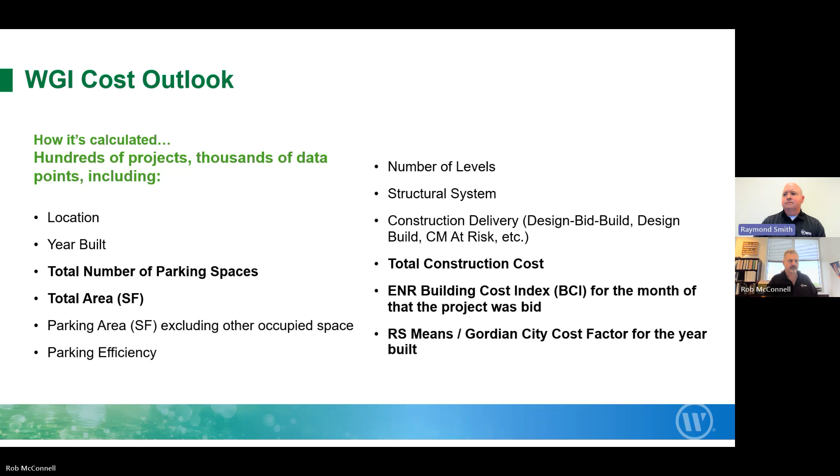So we start with the ENR building cost index, and then next slide we calculate what we call bringing it to today's dollars. So the escalation factor: we take today's ENR building cost index for May of 2026, when we wrote the article, and we divide it by what it was back in July of 2018, and we get an escalation factor of 1.41. That brings that project's construction cost to today's dollars by multiplying the original $4.4 million garage by that factor. And now today it would be 6.19, and it would be 22,000 a space and 64 bucks a square foot.

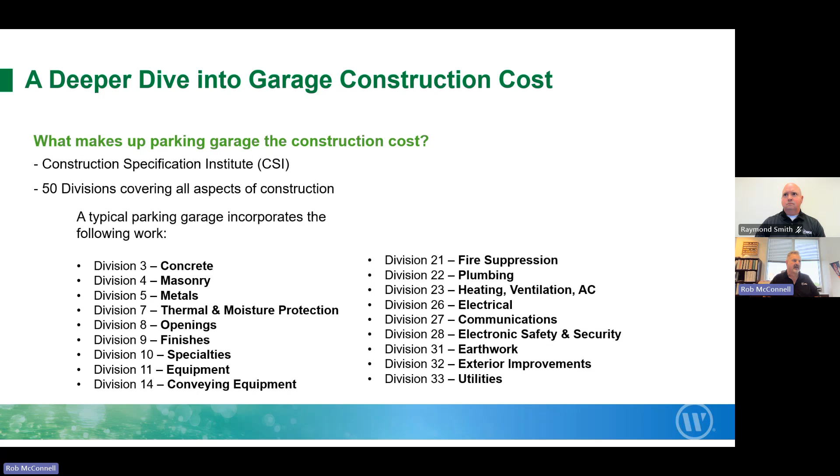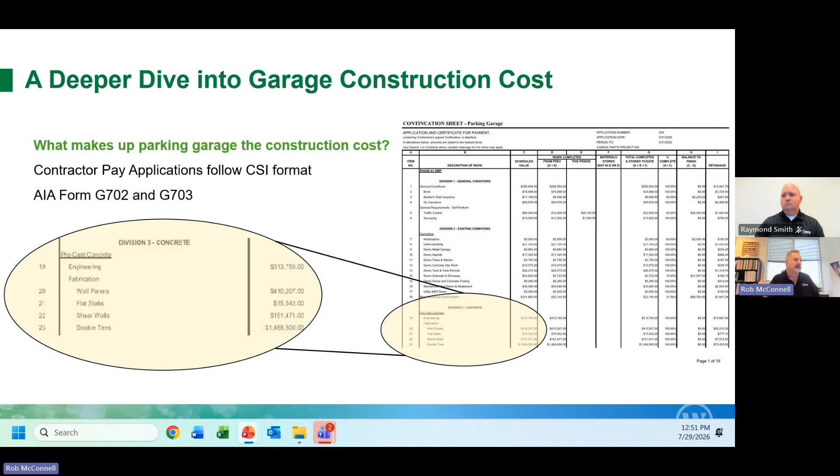So jumping into the nuts and bolts here, the items that make up the foundations and the superstructure, mostly for parking garages: concrete, steel, a little bit of masonry. Unless you have a steel garage, which there are a few of those around, the concrete makes up about half the cost of the garage, and then masonry and steel contribute a little bit, 3 to 4% beyond that. And again, caveat that with if you're putting a roof on the garage, that's going to add more steel cost and whatnot. But that's just in general the superstructure of garages.

When I got into this business, the gentleman that convinced me to come on board said, and this is appealing to a young structural engineer, the beautiful thing about garages is that they're almost pure structure, and that plays itself out in the cost as well. There's very little in the way of finishes and amenities, although that's changing to a certain degree.

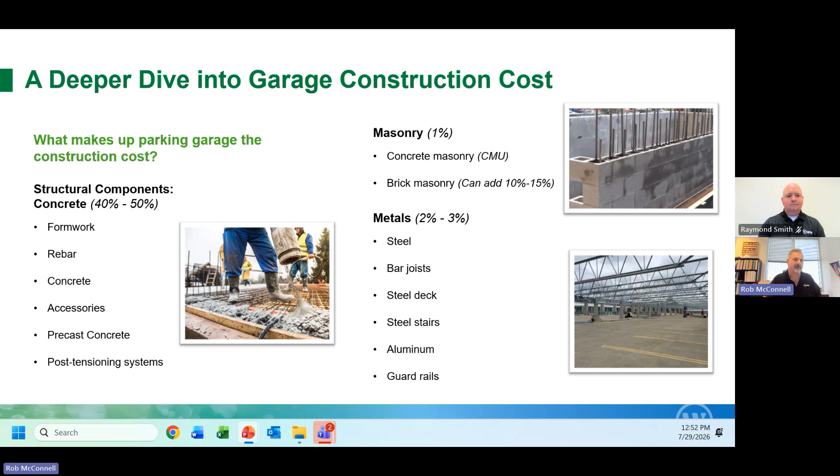The next piece of the puzzle is the durability components: waterproofing systems, membranes, roofing, flashing. These are the items that help a garage last a long time if they're done correctly. They make up somewhere between 1% and 3% of the construction cost typically.

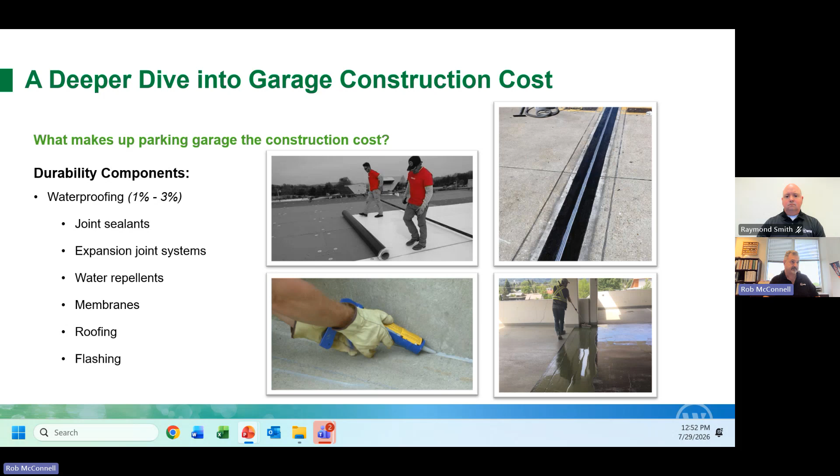The architectural components, the elements that make a garage look nice, make it comfortable and safe to occupy, add to the security and so on and so forth, can vary depending on the complexity of the architecture. If you're doing a parking structure in downtown Savannah or Charleston with all the historic architectural requirements, that's going to drive that cost up. But typically, it's somewhere in the 5 to 10% of the total cost.

And finishes can vary too. You can really enhance the light distribution and feel of the interior by painting the walls and the ceilings, or staining the ceilings, bright white or off-white, and get a lot of bang for the buck. But it does add to the overall cost of the structure.

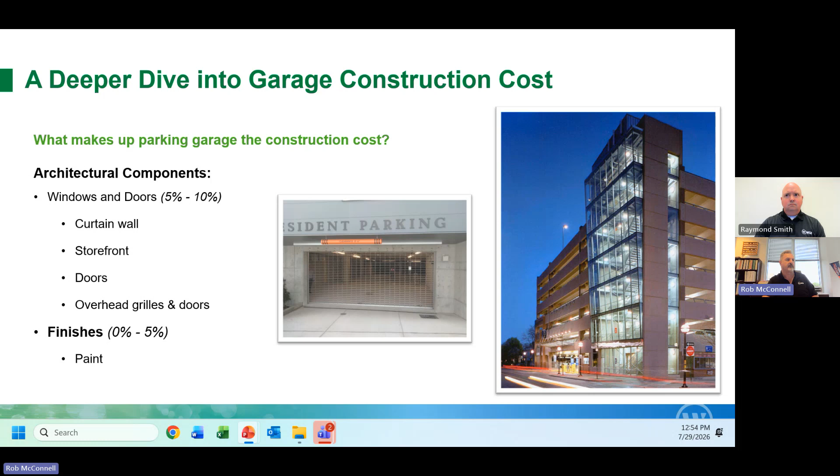Another component is your elevators and your parking specialty systems. And as Ray mentioned, when we were talking about how we've started eliminating older projects from the analysis, not from the database, but from the analysis, parking technology is definitely contributing to some of the increases in costs.

We've moved away from a gate and a ticket spitter and a manned cashier booth, and parking technology is all about occupancy sensing and license plate recognition cameras and software, with artificial intelligence overlays to know who's in your garage and where, and make sure that they're paying, and doing enforcement and collections and all that sort of thing.

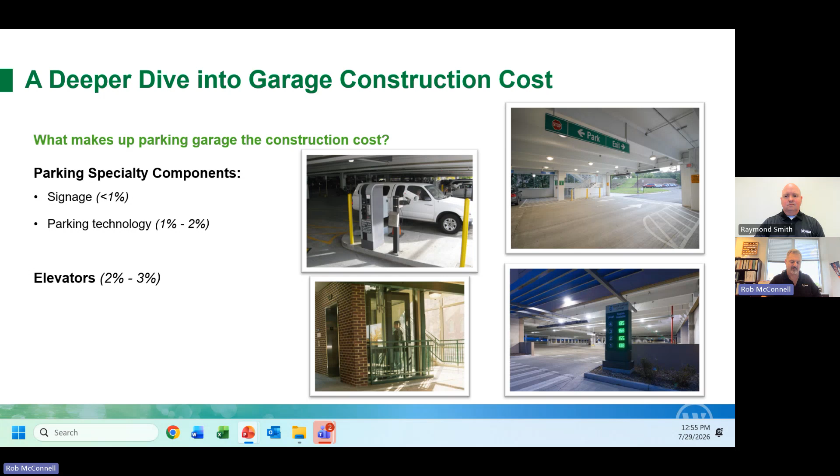So the gates are gone, but the vendors are more than making up for the fact that the gates are gone in a lot of facilities by selling software subscriptions and occupancy sensing technology and so on.

Electrical systems and plumbing systems: the electrical components can make up a significant portion of the garage, and typically most of that cost is lighting, and maybe a little bit for elevators. But a lot of municipalities and jurisdictions are starting to require electric vehicle charging, and some of them, who I won't mention here, have kind of gone off the deep end, mandating the number of EV charging stations installed versus EV charging ready and EV charging capable. That can definitely add a significant percentage to the construction.

Traditionally, we're putting charging stations equivalent to 1 to 2% of the total number of parking spaces in the garage. But some jurisdictions now, parts of California for residential garages, are requiring 100% Level 1 installed. So anyway, that can add a significant percentage.

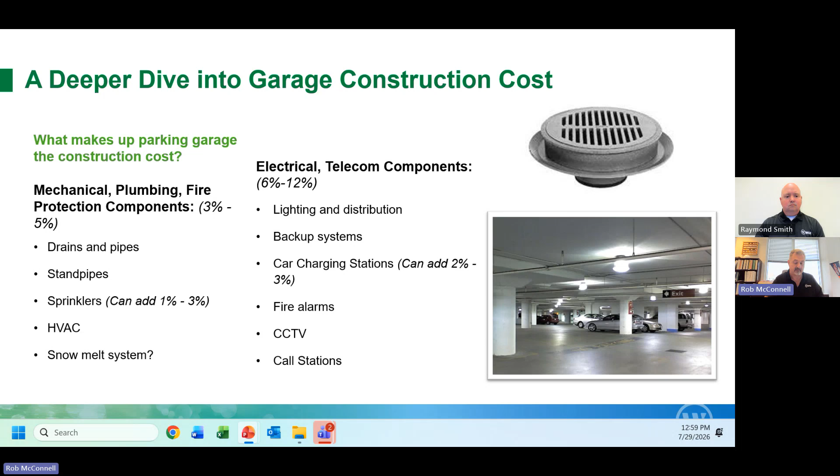Civil components, that's site work, utilities, landscaping, all the stuff that goes into the site work for a parking garage, and that can make up to 10% of the cost depending on the complexity of the site.

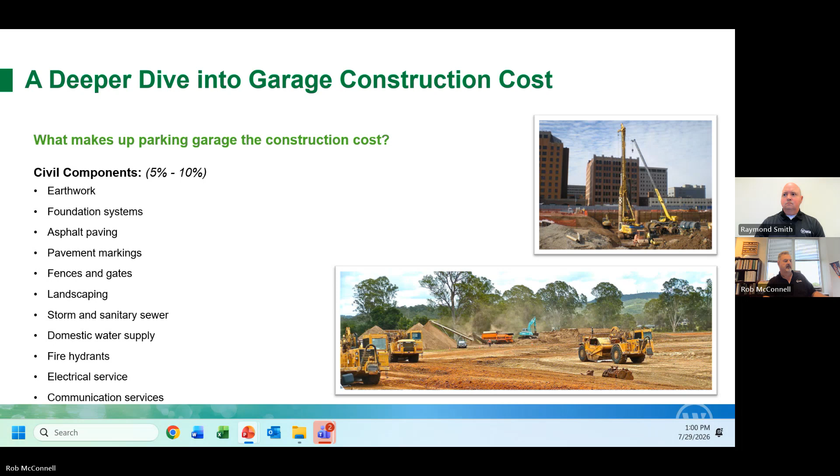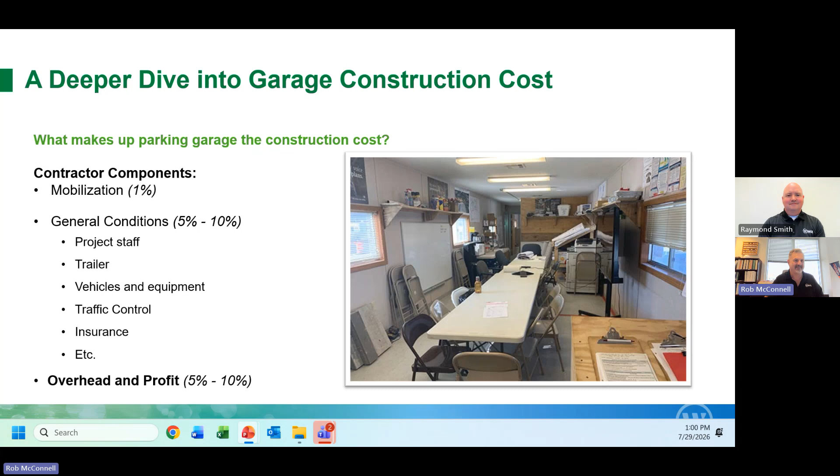And then layered on top of everything else is the contractor's overhead and profit, the cost to mobilize their forces, and then their monthly costs for staff, their trailer, their pickup trucks, computers, copiers, and everything that they pass along. Almost every contractor I've ever seen gets a new pickup truck at the beginning of a project, so that's buried in there somewhere too, right? Anyway, that's the hard costs and how they break down.

Ray, you want to talk about soft costs? Yeah, the other component to an overall garage project is obviously the hard costs, which Rob just talked about, but then there's always the soft costs, and that's where engineering and design services come into play. So you have design fees. It fluctuates from 4 to 8%.

The larger the garage and the less complex it is, the smaller that percentage will be. The smaller the garage and the more complexity, the more you'd be at the higher end for the design fees. You obviously have testing and special inspection costs. You may have land cost for real estate to buy the property, taxes, insurance.

Owners sometimes have to plug in a certain number there to manage the overall project from their end. They also want to have a design and construction contingency to cover any unforeseen conditions that happen as they try to get out of the ground and as things just come up. So they'll add 3 to 10% for owner contingency for construction.

Now that overall soft cost is somewhere between 15 to 25%. And so we normally try to tell our clients to budget around 20% for soft cost. So total project cost would be the hard cost plus the soft cost.

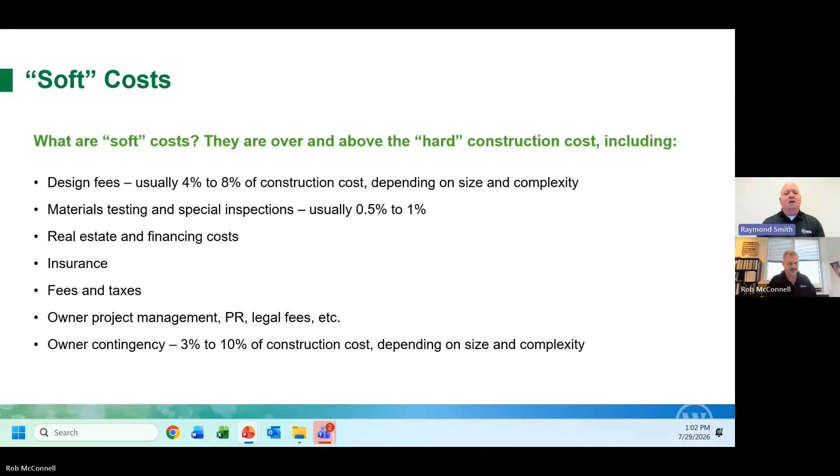Let's dive into the design components of the soft cost. And that's kind of broken down by, you have a prime consultant. That's the person who manages all the other disciplines, keeps them in line, and coordinates directly to the owner. So he's the primary point of contact. That's your prime consultant.

The architect does a lot of the architectural features, the exterior look of the garage, the stairs, the elevators. They do the life safety plans and egress. They handle all the occupied spaces if it's a mixed use facility, the lobbies of the stair towers and such, and they'll detail all that.

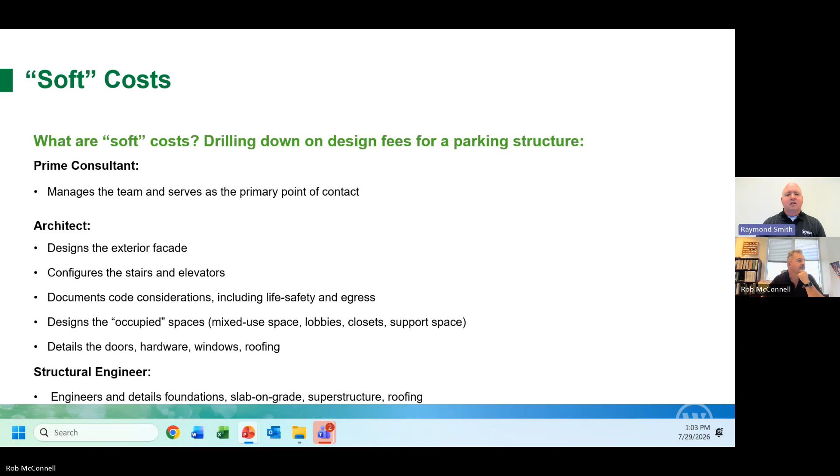The structural engineer, he'll be doing all of the foundation calculations and detailing, slab on grade, superstructure, and then the roofs over the occupied space, stair towers, and elevators. They'll be detailing that. That's kind of what the structural engineer does on a parking garage.

The parking designer, like we are at WGI, we do that in structural engineering along with other components. But the parking designer, he'll lay out the garage. It's all about how you enter the garage and circulate both vertically and horizontally as you try to find your parking space. And then once you get out and you become a pedestrian, we'll define all the wayfinding and signage as you work your way to the stair tower and ultimately out of the garage to your final destination.

We'll also handle the parking technology, the access and revenue control systems, the parking guidance system. If it's a large garage and we're trying to help you find the available space on a large footprint of a single level, you can see the individual lights over the parking stalls that tell you if one's occupied or not. Parking count systems, if you want to know if the garage is full or how many spaces are available. That's all stuff that we lay out and specify as part of our design.

And then we also do the drainage design, which is a whole unique thing all in itself. Trying to make a garage drain as water and salt and snow hit the surface. We're trying to get that to the drains as quickly as possible so that those chlorides don't sit on the deck and create damage. So we're defining the drains and where the drains are located and how the garage slopes to get to the drains. That's an art all in itself. And then we do the waterproofing systems, deck coatings, sealers, sealants, and stuff like that that maintains overall long-term durability.

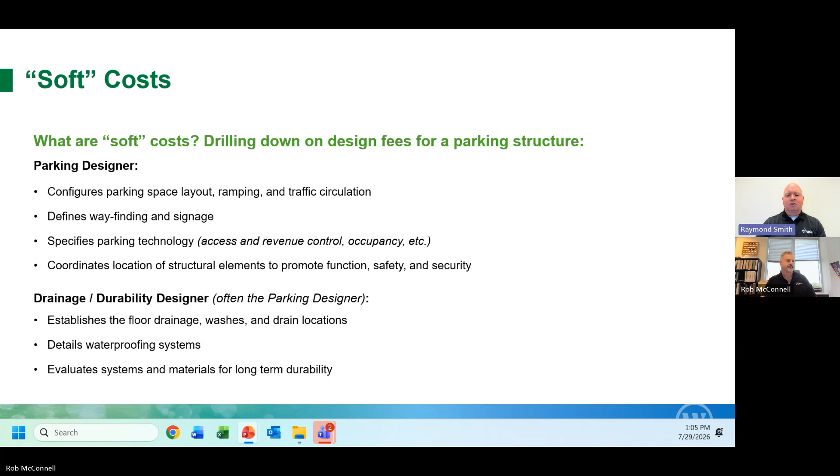The MEP engineer on the job, he's designing the electrical systems. Most important thing on those is the lights and communication. Plumbing engineer, he's getting all that water out of the garage. And if you got some occupied space, then you got some HVAC that you have to lay out and detail.

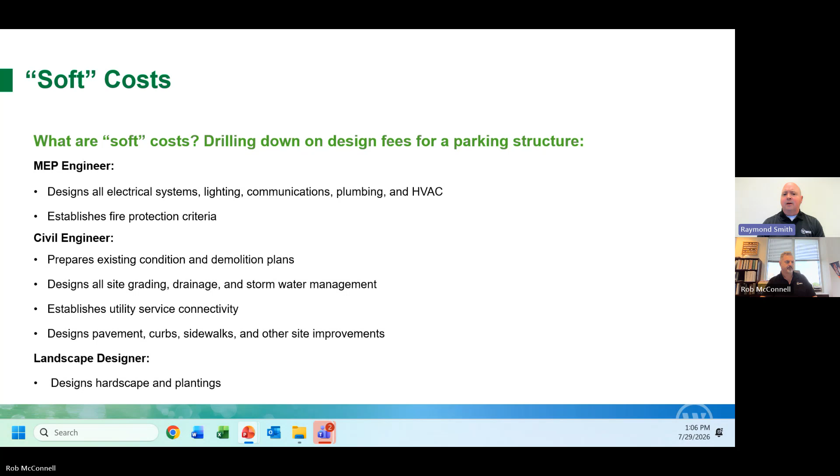Rob touched on earlier, the civil engineer, he's doing all the work around the perimeter of the garage, if you're designing a road that comes up to the garage, landscaping around it for stormwater management systems, they're doing all of that. They take care of all the utilities. The MEP engineer gets the utilities 5 feet outside the building, and the civil engineer takes them from that location and then ultimately hooks them up to the local utilities. And the landscaping guy does all the plants and hardscapes around the perimeter of the garage.

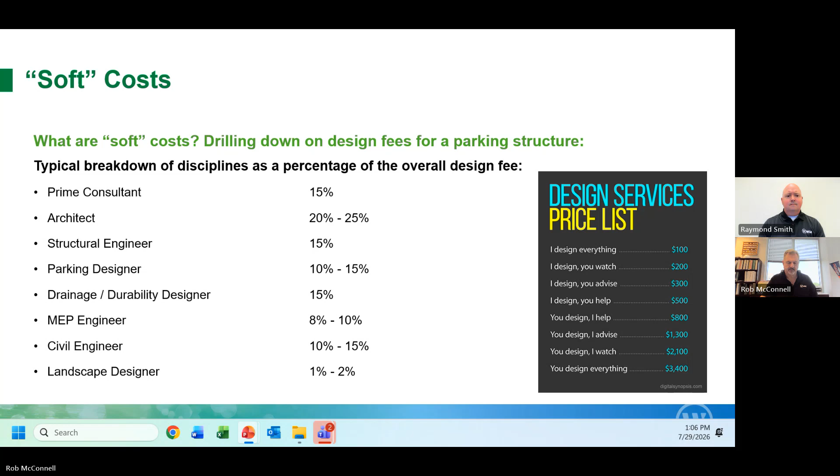All right. So we've talked about what the hard construction costs are, like what you're paying the contractor to build the garage, and we've talked about the soft costs, and Ray dove into the design side of things and how that breaks down. But let's say at this point you have now built your garage and it's open for business.

You're still not done paying for it. Well, obviously, if you financed it, you've got finance costs too, but you still have to budget money to operate and maintain a parking garage. And this is where some people miss the boat a little bit, in that they don't understand that there's a pretty significant annual cost to operate and maintain a facility.

There's a variety of elements that go into operations and maintenance. And for those of you that may have seen prior presentations, we fleshed this out a little bit more, parsed it out a little bit beyond what we did last year. So the biggest expense typically on a parking structure, parking facility, are the utility costs.